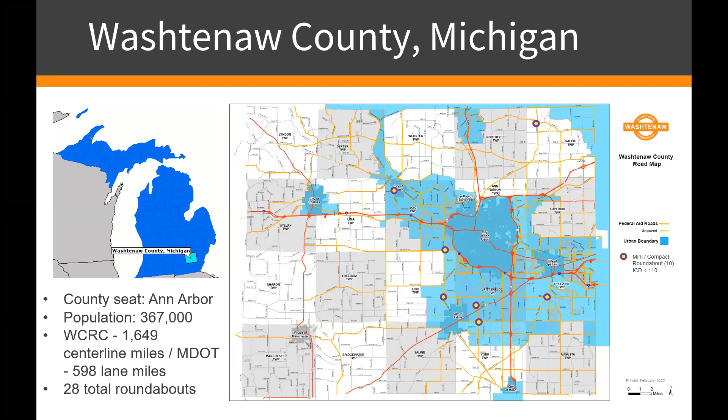We have 28 total roundabouts here in Washtenaw County, and of those, about 10 are what we'll call mini roundabouts or smaller roundabouts - that's the yellow bullseye with the purple around it. Full disclosure: when I say small roundabout and mini roundabout, I mean one and the same. Now, if you get into the breakdown with Federal Highway, it'll tell you 90 and less is a mini roundabout. Basically, most of my roundabouts here are between 90 and 110 - that's what I consider small or mini. So don't get hung up on the term, whether something at 110 should be called mini.

So moving on, why smaller roundabouts? From my perspective, it's because we can no longer afford the status quo. The last time the federal gas tax was increased was 1997, as part of the Taxpayer Relief Act. Ever since then, we've been collecting about 18.5 cents per gallon that goes to Washington D.C., then gets distributed unevenly - some states are donors, others aren't. On top of that, that revenue is not adjusted for inflation whatsoever. So we know the cost of living, labor, and materials has gone up substantially since 1997, to the point of a 60% increase per the Bureau of Labor Statistics.

So in a perfect world, if money were no object and we had unlimited resources, we could build a traditional size roundabout of say 130 or 140 ICD. ICD, for those new to roundabouts, is the inscribed circle diameter - basically think of it as the diameter of the roundabout itself. If you can build between 130 and 140, I'd say great. But the reality is we don't have those unlimited resources.

So instead of trying to do more with less, I like to say we do more with what we have available to us. I feel like we've really come a long way - Mark Lenters and I and a handful of others - in helping communities out and providing smaller roundabouts, and still achieving your goals. So how can we reduce costs but not their effectiveness? That's an important question to ask ourselves.

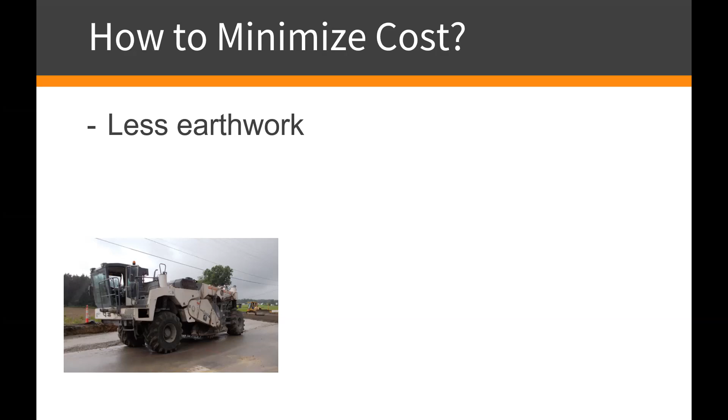It still drains, so I pulverize the existing asphalt that's there. Then within the roundabout itself, the inscribed circle, I'll widen and put stone in. Essentially what I'm doing is leaving everything there with the pulverizer. We'll shape it, move it around, get density, and then use it. So we're not double handling material, we're not trucking material. That saves us money.

Second, anytime you can reduce storm sewer, you're going to win. Most of my smaller roundabouts here have approaches of 300 foot, give or take, and as long as you're under that mark, you don't need storm sewer. Not always, I try to limit it though. What I do is curb and gutter with spillways draining into ditches. If I'm in a very urban environment with sidewalks and curb and gutter, that's not possible. But when you can, try to limit your storm sewer, because that's less material and less time to construct the roundabout.

And then finally, production paving is what really brings in the dollars for roundabout paving. Roundabouts are not production paving. By production, I mean you take the paver up to the flow boy, material mix goes into the hopper, and off you go. With the roundabout, you have a lot of stop and go.

Here you see a picture of a front end loader with the bucket transporting mix from the flow boy to the hopper of the paver, moving around the circle. But with that smaller footprint, if you can get that material built in a half day, that crew can then go to another site the second day, mobilize to another site where you're not being billed for the entire day's worth of work. So there's some dollar savings right there.

So from that perspective, those are the three main ways you can reduce your cost. I want to state this is very important too, because sometimes they'll get hung up on cost here. The dollar figures I'm going to quote you, although substantially cheaper than what I have been building in the past, one, it's gone up a little bit since these projects went in place, but two, every market is different.

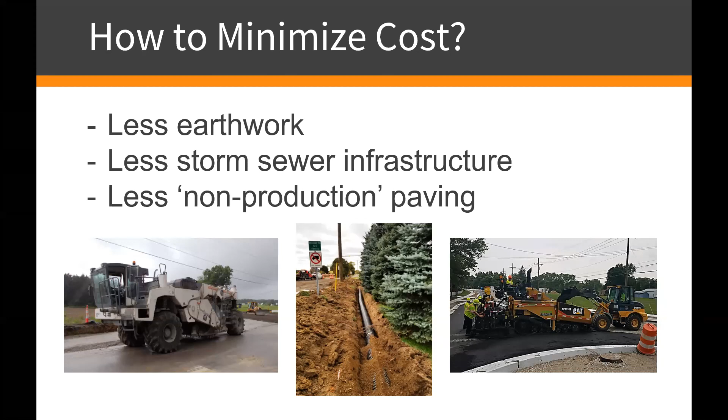So although you may not be able to get the figures that we can get here in Washtenaw County for whatever reason, when you compare it to your neighborhood and your market, you're still likely going to be winning when it comes to reducing your costs. So that's important for you guys to keep in mind as we go through the slides here.

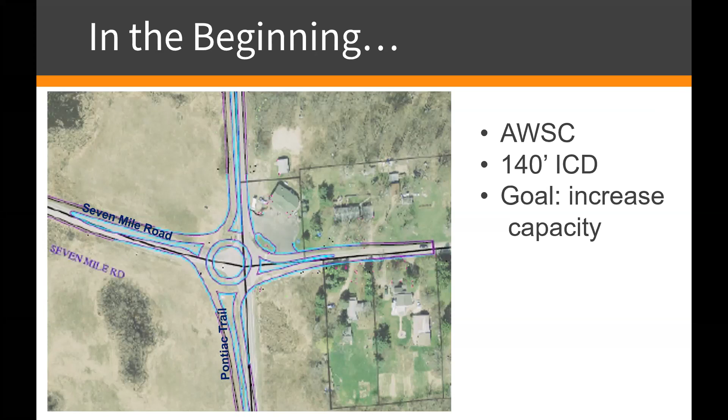So where it all began: Pontiac Trail and 7 Mile Road. In 2013, this is actually Mr. Lenters' design here. It's a four-way, all-way stop controlled intersection, and the goal was to increase capacity because at PM peak hours it backs up quite a bit on Pontiac Trail, which runs up and down, with 7 Mile left and right. With this 140-foot ICD, there was a general store, a party store for those of you familiar with the Midwest term, where you can get your liquor and other things. It would have been frankly a total take had we shifted the right of way onto their property. So we put the footprint onto the west side, both the northwest and southwest corners. Those were zoned for commercial use, but still in development concept only.

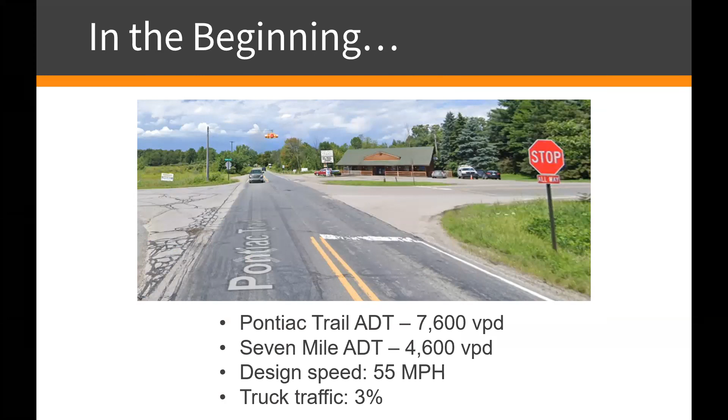So here's some background information. Pontiac Trail has average daily traffic of 7,600 vehicles per day, 7 Mile Road 4,600. Design speeds of approaching vehicles are 55 miles an hour with 3% truck traffic. Where things came apart from a fiscal standpoint was the amount of right-of-way that was needed.

As I told you, we shifted the footprint of that roundabout over to the west so we didn't have to have a total take on that party store on the northeast corner. Well, lo and behold, we ended up needing 0.55 acres, just over a half acre. We were of the opinion that it wasn't going to cost that much, frankly. We were guessing in the neighborhood of, say, $50,000, give or take.

Well, we ended up going through the formal process of an appraisal, and to our surprise, it came over $100,000. I think it was close to 120. The property owner who owned both corners there was seeking $300,000 plus, and we're just in no position to be able to come close to a number.

So ultimately what we had to end up doing was canceling the project, return the federal aid, which in this case was CMAQ dollars, and it sat until last summer, where we actually built a mini roundabout of an ICD of 90 foot and needed substantially less right of way.

But this was kind of a disappointment, not kind of, it was a disappointment. It was a setback because, you know, it was a need. It was our number 1 rated intersection when it came to capacity needs to do something. So, yeah, it stung. It stung that we weren't able to make this project go ahead and start.

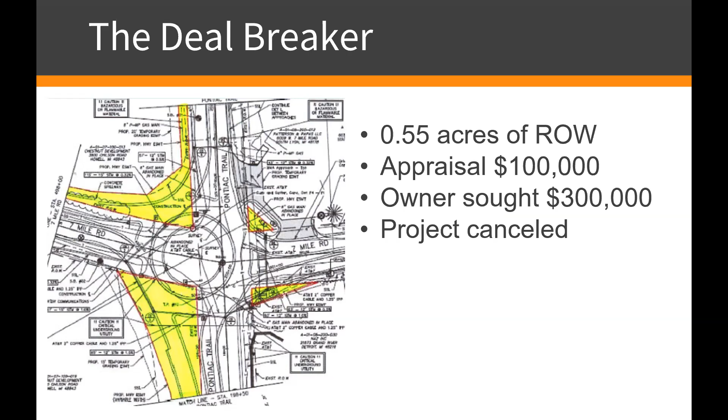So that led us to our first roundabout project at Textile, Hitchingham, and Stony Creek Road, which occurred in 2015. More or less 6 months later, we had an informal meeting internally, and the people within the organization came to me, knowing that I was going to lead the charge of the design, and said, Mark, what do you think?

Should we put a roundabout or a traffic signal there? And the first thing that came back to mind was how we got stung at Pontiac Trail and 7 Mile Road. And I was like, well, maybe we should consider the concept of a mini roundabout. And everyone at the table kind of looked at me like, what are you talking about, Mark? Like I had a third eye on my forehead.

Well, Wei Zhang is a mini roundabout expert. He is a representative for the Federal Highway Administration out of Virginia. Perhaps some of you know him. I met Wei and saw a presentation of his at one of the roundabout conferences that stuck in my head, and I asked myself, would this be a good candidate to put mini roundabouts in at these two locations?

And Mark Lenters would be the first one to tell you when I floated this idea to him, he's like, I don't know, man. But we both agreed, let's go talk to Wei. My bosses agreed, let's talk to Federal Highway, see what they have to say.

So here's the layout of that intersection. Textile Road runs from side to side. Stony Creek Road is on an angle. Hitchingham Road runs up and down. So the only two intersections we were looking at was on the Textile Road corridor.

They were both all-way stop control intersections. And the problem was that it took 20 minutes at 8 o'clock to get through these two intersections combined because of the four-way traffic.

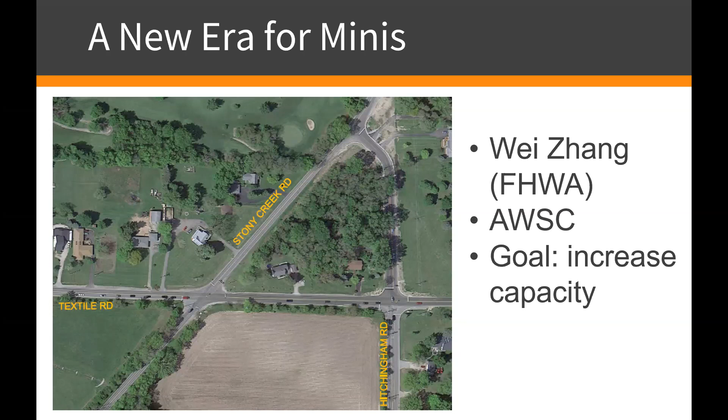So with them being all-way stop control intersections, the goal was to increase capacity. And ultimately, when I approached Wei and talked to him about this conundrum and idea, he agreed to look at our data and see if it would be a good candidate. He was looking for people to have projects and do some before and after analysis.

So some background traffic here. Approach speeds 45, 55 miles an hour coming in. You have the ADTs of 66, 68, and 42. So relatively well balanced and 4% trucks.

And lo and behold, Wei Zhang, after looking at his software, said, yes, this is going to work, and it's going to work really well. It's going to be a little bit on the upper end as far as what it can handle capacity-wise, but it can work. And if and when it gets to the point of oversaturation at the PM peak hours, then you could put another roundabout at Stony Creek and Hitchingham to use as a bypass.

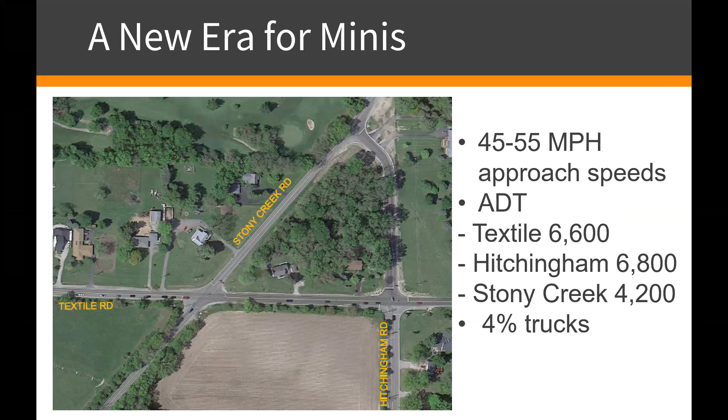This is the footprint that we ultimately went with. The ICDs were 90 foot. And then the total cost for both roundabouts were $800,000, so that was $400,000 per roundabout in 2015 dollars. So again, don't get hung up on that number. Maybe you can or cannot get that close in your community in the southeast part of the country.

You have a better chance than you will in New England states. But my point is that every market is unique.

One of the trade-offs I want to warn you about is these roundabouts do break under traffic. By breaking, what I mean is you'll get a level of service F. And it doesn't really matter what your ADT is from my perspective.

It's all about your peak hour factors, because that's how you rate a roundabout, as far as can it handle the peak hour 10 or 20 years out, with reasonable growth factors in that time. And if you start getting into 1,500, 1,600 vehicles in the peak hour from all approaches, chances are for a 90-foot roundabout, you're going to start stressing it.

It'll work like it does in this case, but you're not going to have a lot of room left for capacity should things expand and grow in the area. So maybe you want to increase the diameter, say to 100 or 110 feet, which is still cost savings compared to a traditional 130.

But the point is that you have to be very mindful of what your traffic volumes will be going into these intersections 10, 20 years out, so that you're not criticized, say 5 years down the road, when you're experiencing a level of service D, E, or F because you didn't account for the right amount of traffic during its design life.

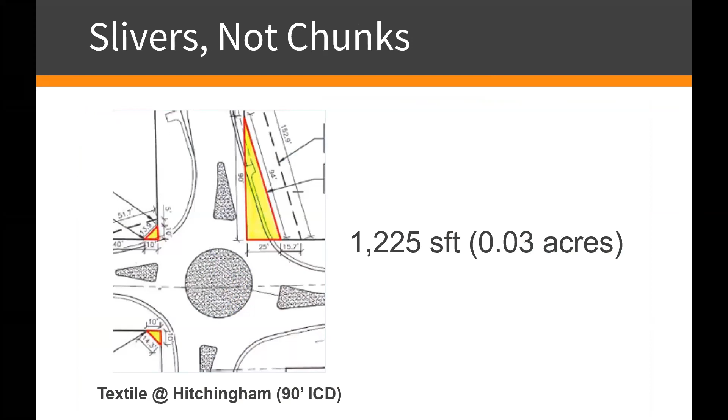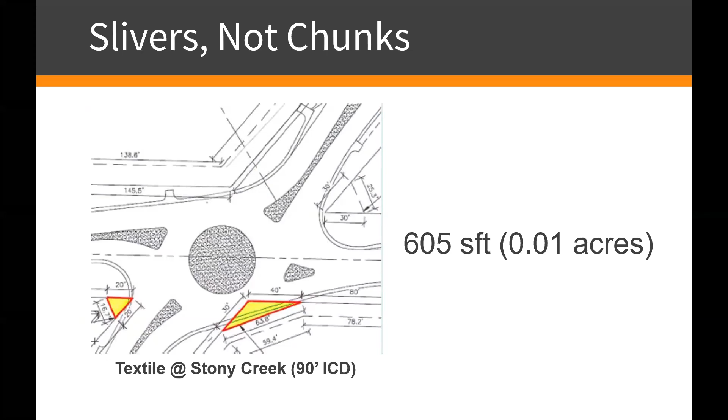So let's talk about the right of way. I was talking about the Pontiac Trail and 7 Mile intersection, how we needed 0.55 acres. In this case, with the 90-foot ICD diameter roundabout for the Textile and Hitchingham intersection, we only needed 0.03 acres. And then for the one at the angle on Stony Creek and Textile, just 0.01 acres. So a total of 0.04 acres for 2 intersections.

For a grand total land cost of $3,575 in 2014. That's huge, because that's a 92% reduction in area compared to a traditional size roundabout.

Now, keep in mind that every zoning is different as far as the land goes, but it's really all relative, because if it's zoned commercial or zoned farming, it's still going to cost you less. It's just going to cost you substantially less if it happens to be something that's not agricultural in use, especially if it's zoned industrial or commercial.

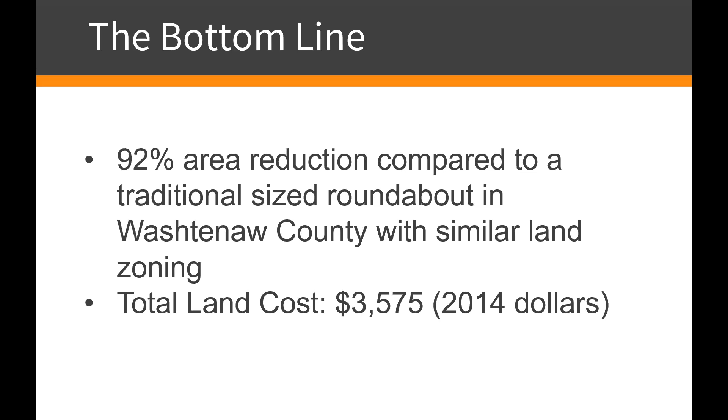So the mini roundabouts will give you a big win when it comes to less need to purchase right of way, and also reduced impact on the property owners that are right next to the project occurring.

So let's talk about the center island itself. What makes a mini roundabout different from a regular roundabout? Frankly, not much, other than the fact that because it's smaller, the circulating roadway is smaller in nature.

The larger trucks or farm equipment, we're talking about combines, if they happen to run with their heads on there - in Michigan, they don't, they typically tow those behind on a pickup truck - but they off track onto the center island.

Now, this is not Textile Road, this is a different roundabout I call Moon and Bemis. But you'll see there that all the off tracking in every which direction makes it a great example of how, when trucks are turning left, that's what it's there for.

So you don't want to put something in your mini roundabout in the center island because it's there for off tracking to turn left, and in some cases right, if you've got a pretty skewed angle. So you'll need to put some type of apron in.

We raise ours 3 to 4 inches in height, and we do that because it still allows the trucks to be able to off track and make their left turning maneuver, but it also discourages the sedans from driving up and over them.

Our first runs at Textile and Stony Creek and Hitchingham were flat. And I'd say about 15% of the traffic in off-peak hours just disregarded it and did a direct left across it. Not a big deal, but it was concerning to some residents in the area when they witnessed it.

So we ended up just raising the island a little bit, giving just enough of a deterrent where people in sedans didn't want to drive over it. It forced them to drive around it, but at the same time it was more than adequate for trucks to be able to turn left over.

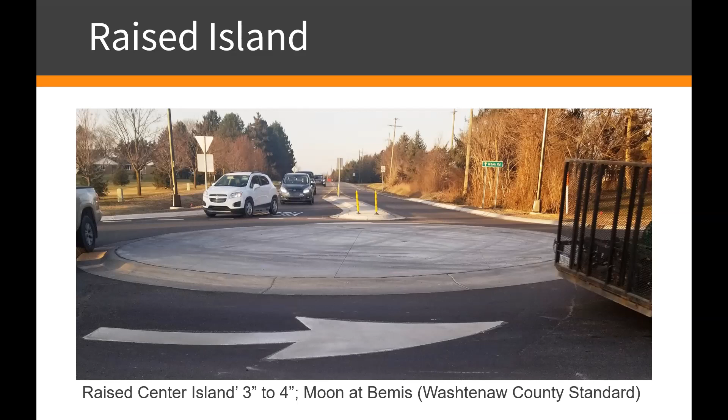All right, I'm going to take a quick drink here as we segue into the Baker Road roundabouts.

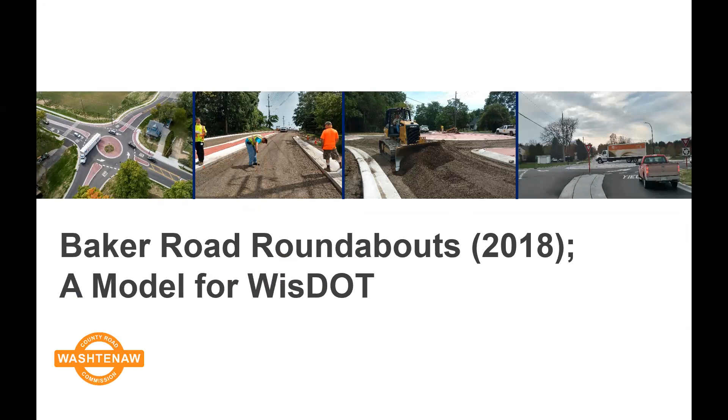So Baker Road is an example of a larger size roundabout that you can utilize where you have more commercial trucking. The more trucking you have, chances are you're going to want something a little bit bigger. So a little bit of background here: this was done in the city of Dexter. There is a school complex, Dexter Community Schools. This road, Baker Road, connects to Interstate 94, 2 miles to the south. Then Dan Hoey Road is an industrial road, an all-season road that connects to an industrial park, as well as Baker Road being an all-season roadway too.

So we have a lot of WB67s commuting back and forth from Interstate 94 to make deliveries to the industrial park 5 days a week. So we had to have two intersections that made sense to accommodate this truck traffic.

The city of Dexter, we had Shield Road. When I say we, Washtenaw County Road Commission had jurisdiction of Shield Road. Parents of new drivers at Dexter High School at 2:30 were concerned about their children pulling out of a two-way stop controlled intersection for the apartment complex on Shield, turning left on Baker to go into town, with traffic coming in at 55 miles an hour, sometimes higher. They felt a project needed to happen to slow down those speeds.

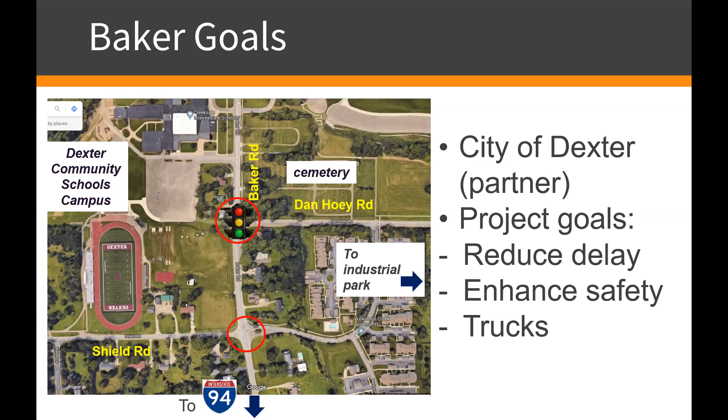The City of Dexter heard about this and said, hey, let's work together in tandem and do something similar, so it just made sense. The City of Dexter owns the Baker and Dan Hoey roundabout. So together we combined to put a roundabout project together. Ben Wilkinson out of Madison primarily did this under Mark Lenters' leadership.

Where you see the footprint here, it's oriented a little bit differently, with Shield Road to the left and Dan Hoey Road to the right. Both of these have an ICD of 100 foot, but the one at Dan Hoey Road is skewed 105 to 95 in the shape of an ellipse. The reason is that there was a cemetery there with Civil War veterans buried right in the corner, and we had no desire to transport them someplace else. So we got creative with where we could build, so we didn't have to exhume the bodies. That's how we came up with the oval shape, and it worked out fairly well.

Ultimately, we ended up having a third partner come along, Dexter Community Schools. That was a key intersection before the project happened. They wanted to have another point of ingress/egress for traffic for football games. So basically we worked with them and they became a third funding partner to make that into a four-way legged roundabout.

The total project cost in 2018 dollars—this is a completely urban environment, so with street lighting, sidewalk, curb and gutter, storm sewer, 2 roundabouts—came to $1.3 million for an ICD of 100 foot. So again, pretty substantial savings when you think about it, because for many communities, a traditional roundabout costs $1 to $1.5 million just for one roundabout.

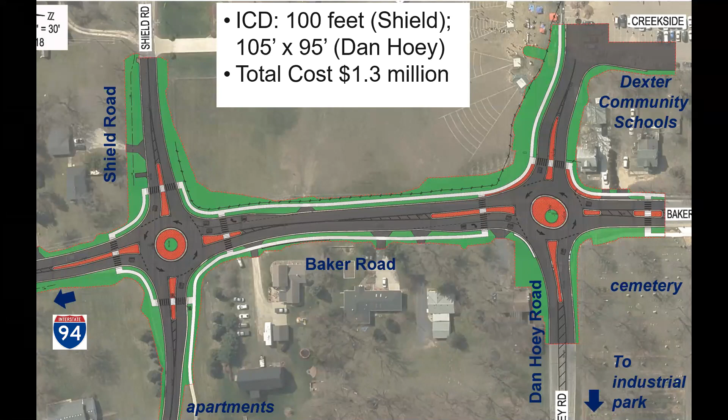And it worked out really well. So here's some ADT: Baker Road, 14,000 vehicles per day; Shield Road, 3,200; Dan Hoey Road, 5,800; and you can see the speeds coming in. Now the truck traffic sounds low at 3%, but keep in mind that when you have 14,000 vehicles per day on Baker Road, that's why that number looks so low.

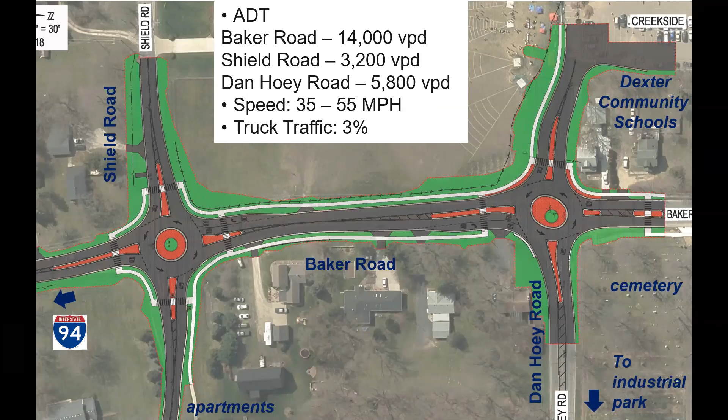Here's the footprint of the final project via a drone. You can see a WB that looks to me like it'd be a WB-62 turning left from Baker Road onto Dan Hoey Road there.

And that's what that apron's there for. It works very well. Now this one happened to be big enough where the city of Dexter was able to put some landscaping there in that little dot, just to give it a little bit of spice, since it's an entry point coming into town. That works out well. But the other roundabouts, when you have a 90-foot ICD, you're not going to have enough real estate to put something like that into your center island design.

So here is an example of trucks going from Baker Road to Dan Hoey Road, both inbound and outbound. You see there's a dedicated right turn lane there because the volumes warranted it.

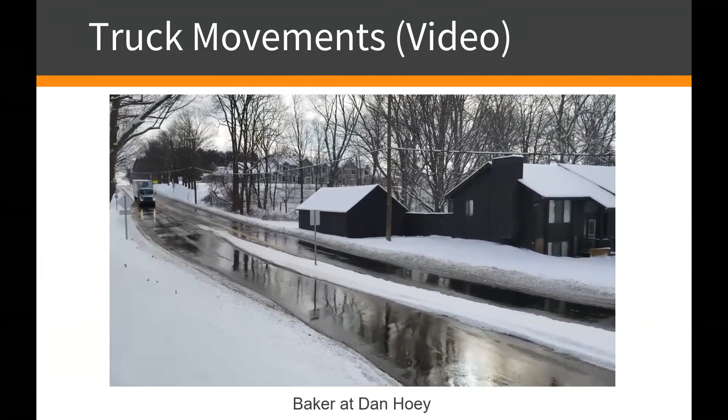So I'm standing on the cemetery corner there, elevated up in the air. Very important load there, Miller Lite. He waves to me, I wave back to him.

Now you're going to notice here that the truck's going to off-track onto the center island. That's okay, that's what it's there for, that's what it's designed for. And it goes up, a little bit of a shift, slow speed, and off it goes to Interstate 94 to wherever its next destination is. So mission accomplished, big success in the community.

This, by the way, has pedestrian crosswalks for Friday night lights. We don't have time to show you, but it works out very well to accommodate pedestrian use, from small tykes with grandma and grandpa to unsupervised teenagers going to the football game.

So let's conclude here and talk about drilling for data and what I've learned. So improved operations at Moon and Bemis: for an all-way stop controlled intersection, I gave you some background on this in a longer presentation, but this had an ICD of 82, and the total cost of this one to a contractor was $300,000. That was an all-way stop controlled intersection and it had a level of service of F beforehand.

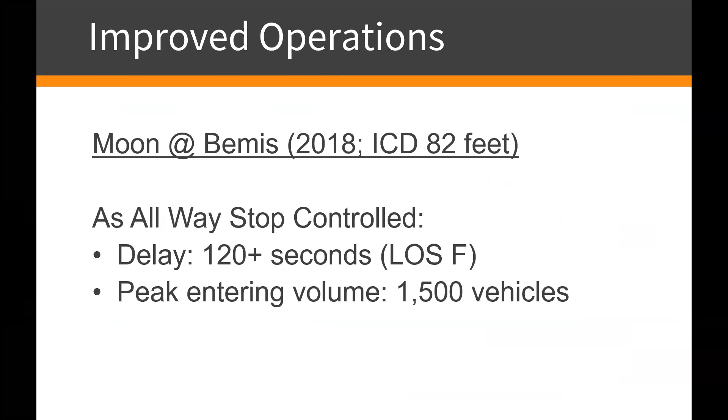Once we had peak entering traffic volumes of 1,500 at the peak hour, and once we built that, our operations increased substantially for $300,000 to a level of service of B in the AM, at 13 seconds overall, and then a PM peak of A at 8 seconds. So when you think about that, that is a lot of bang for your buck when it comes to having to do more with what you have available to you.

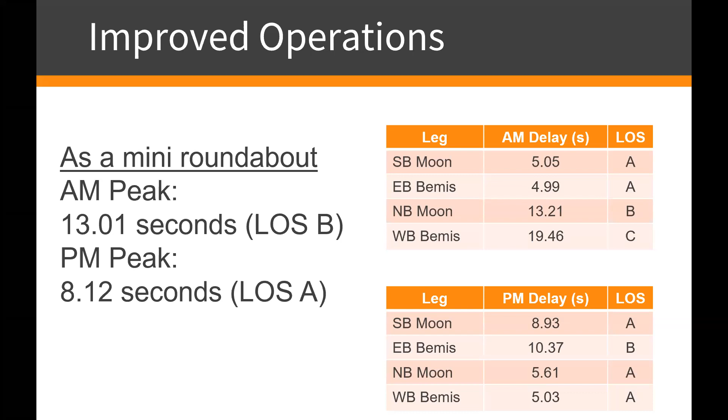But let's talk about that one trade-off, the most important trade-off that comes with this. I promise you that under most circumstances, you will have an increase in what we'll call PDO crashes. In Michigan, we call it property damage only. Many states call them the same thing, but perhaps your state's a little different. I like to call them fender bender crashes, or deductible crashes, where everyone walks away, no one's hurt, you pull the car off to the side of the road, and you end up having to take your car to a body shop.

With many of our all-way stop controlled intersections, we were having about 5 crashes per year. And in many of those crashes, people were getting hurt. In some cases, they were getting killed because they're getting T-boned at 55 miles per hour or higher. It happened in more than one intersection, okay?

But when you put in a smaller roundabout, a mini roundabout, anywhere from the size of 90 to 100, 110 of an ICD, you're going to have in total somewhere between 8 and 15 PDO crashes per year. And if you get hung up on the number jumping from 5 to 8 or 15, people are going to say, oh my gosh, you made this intersection worse. How could you be so ignorant, how could you be so careless in what you're doing?

My perspective is completely different. No, we made it safer. Not every crash is the same. Every crash is unique in its own respect, just like every roundabout is unique.

And when you look at all the factors when it comes to reduced costs, reduced impacts to property owners, reduced right-of-way costs, reduced time to construct it, shorter detour routes in duration and time—because time is money to people—fewer emissions into the environment, increased capacity, and people are not getting hurt. Although there's a spike in the PDO crashes, when you factor everything else in, we here in Washtenaw County are of the opinion we're doing the right thing, and we're being fiscally responsible for what we have available to us to deliver in both capacity and safety.

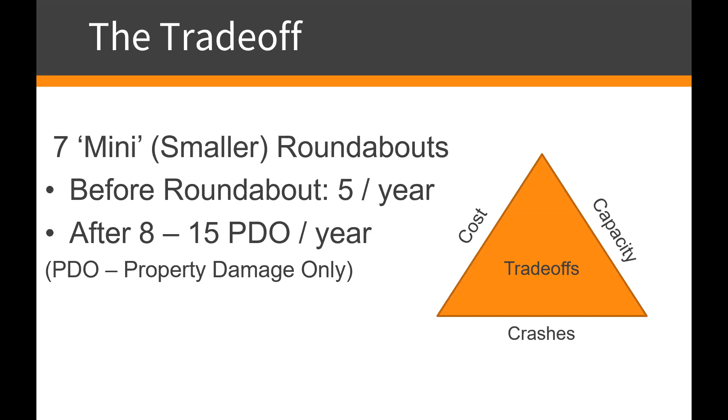So I just want you to be aware of these figures as you go into it, because I don't want you to get caught off guard. Maybe your mayor, your city council, or your county council will say that's not something politically we're willing to do. So be it. Here in Washtenaw County, it is acceptable for the most part, and we've been given the green light and asked again and again to build a mini roundabout here, there, and other places where it makes sense. That's the biggest trade-off I wanted to bring to your attention.

So let's finish up with recipes for success in the world of Mark McCulloch. I would start with the minimum ICD of 90 feet. I've gone less, and it gets trickier, with PDO crashes tending to go above 15 if you do that. So from my perspective, the base is 90, work up from there. You're not going to get a substantial cost difference by going below 90 feet.

I learned that the sweet spot is 100 to 110. That's when people come to us and say, hey man, I really like that roundabout, can you do something like that again?

From my perspective, all-way stop control intersections work better for mini roundabouts than two-way stop control intersections, because people are already conditioned to stop. That's important, because with a two-way stop controlled intersection on 2 of the legs, they're not conditioned to stop. That's not to say you can't do it, but it's very critical that you have excellent entry angle deflection coming into the roundabout so that drivers are ready to slow their cars down to about 25 miles an hour through the roundabout.

Use realistic growth factors, because if you don't, your numbers are going to be flawed. It's going to tell you that you're going to be way above 1,600 vehicles per hour, and it's going to tell you that you need something bigger when in fact you probably don't.

Buy-in is critical. Make sure you talk to your fire chief, your police chief, and any other stakeholder. In Michigan, we have townships, and those are our stakeholders too, so we talk to our township boards to make sure they understand why we're doing a project like this. For the most part, they've seen enough of them to know we're on the right track.

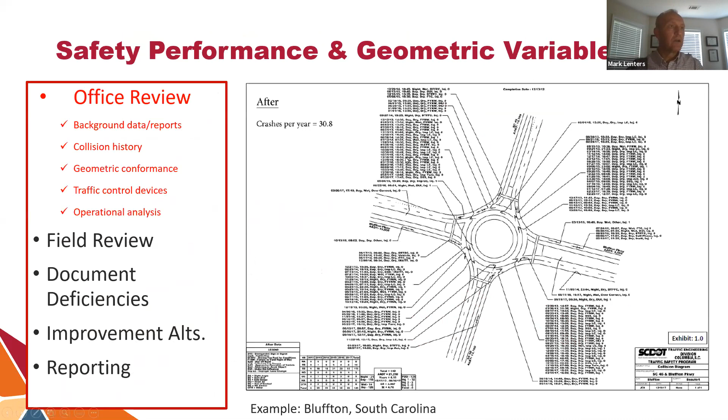In the example that I showed you, you could see that we have a problem with exit circulating—a serious problem with high incidence of exit circulating crashes. So all we can get right now with these models is the percent crashes in terms of the percent of the whole for that site. But we don't have a safety prediction model. So that's still something we need.

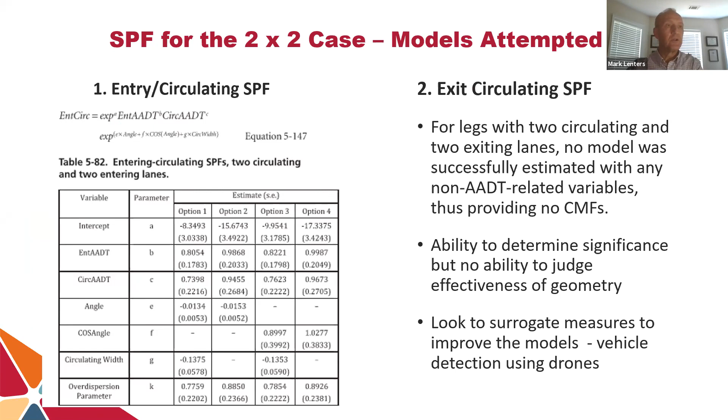Nevertheless, we moved on with the project, and without fully developed models and weak crash prediction at the geometry level, we turned to engineering judgment for some of the support. I'll show you some technology towards the end of the slide set that's going to improve our ability to do crash prediction at the geometry level.

So in the field review, this roundabout was built about 7 or 8 years ago. Annual frequency of crashes actually did reduce in the conversion from signal or stop control to roundabout, and so did the crash severities, but not sufficiently to be deemed a success. I'm going to give you a quick overview of the study and the solutions, and show the point where we departed from the ability to be data-driven and went more in the direction of engineering judgment.

With the current NCHRP 888, we might have had a better chance to at least identify the percentage split with confidence and say we do have an overrepresented condition of exit crashes, and that will help drive the justification of the improvement—that confidence in the data, that confidence in the analysis of that crash information. So ultimately, engineering judgment played a bigger role in the development of the results, using a more rational method and not so much data-driven. I was asked to review the conditions in service and suggest some possible countermeasures.

The office review, essentially the crash diagram and geometric conformance, identified the possible target crash pattern of entry circulating, exit circulating, but not with absolute confidence. So we turned to the field review and sought to identify causal factors with a focus on entry circulating, exiting crash patterns. What the observation showed us was that drivers were not having sufficient time to cross the gap, essentially the gap being the sketched green area.

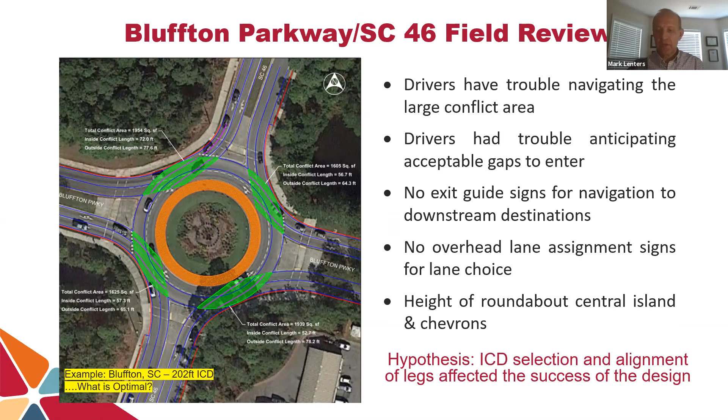This is something we've seen in many states, the idea of overhead lane designation. At least we sort out the lane choice problem so people aren't making lefts from the right lane, and that will help the situation. There were a number of sideswipe crashes circulating, certainly not an overrepresented pattern, but at least wayfinding would be minimized.

And then to turn to education as another remedy, helping people understand what lane to pick for what movements. These are education pieces that we've had in circulation with many agencies.

Another option for a medium term countermeasure was to look at a hybrid roundabout, essentially in brute force way, reducing the number of conflict points in half, just essentially 2 by 1 with the right turn, still having a conflict point, but only with the right turn exiting traffic.

But this, in a sense, is going to cut capacity down too. Here someone's constructed a 2-lane roundabout, and we're going to lose one through lane and left, and the availability of all that extra throughput capacity, because we're cutting out one through lane and making it a right turn only. So while this can be done and it would improve safety, it's more costly and it would degrade capacity.

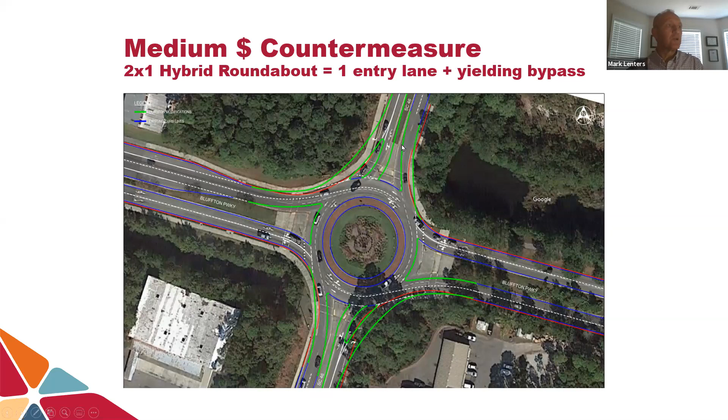Now that's not a model, that's somewhat engineering judgment. And so it would have been nice to have the NCHRP data to support us and dig a little deeper into that data set to see if we could pull out some of the geometric parameters that might justify something a little less costly than this.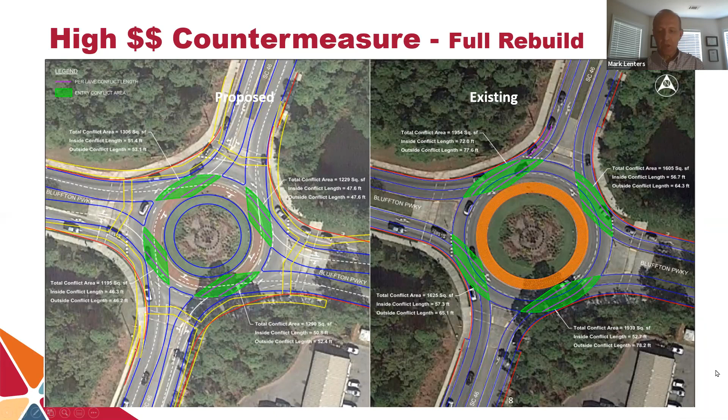So information that wasn't previously available for safety reviews includes things like speeds, conflicts, as I've been looking at with the patterns observed in the field. Truck tracking is another big one. We can't generate precise measurements of those things, particularly speeds.

And significance testing of crash patterns. We haven't been able to get good confidence in that at the intersection, below the intersection level, at the geometry level. So capturing statistics on in-service conditions and reference statistics for significance testing has been difficult.

Turning to drone video analysis with emerging collision prediction models is going to afford a more comprehensive understanding of roundabout functionality, and there are many things it could contribute to in the future. This gives us recommendations for in-service reviews to update geometry, markings, lane width, signage, and so on with greater confidence.

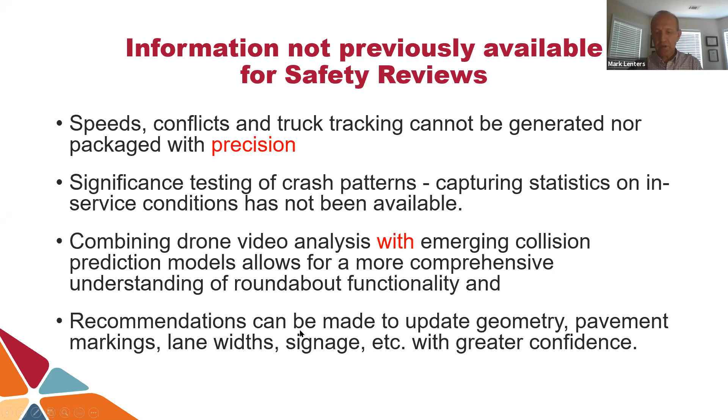Looking at traditional crash diagrams, like this study from a site in Ohio, we've always been able to identify crash clusters, but how do we attach significance to the documented pattern? When is the pattern significant, not only for the site but compared to other roundabouts? Without good significance testing, we risk identifying false positives, thinking it's a problem when it isn't, and then spending money unnecessarily. It'd be like going to the doctor and having a gallbladder operation when it's actually your appendix that should come out. Historically, as a practice community, we've sometimes gone ahead with costly countermeasures without the highest degree of confidence.

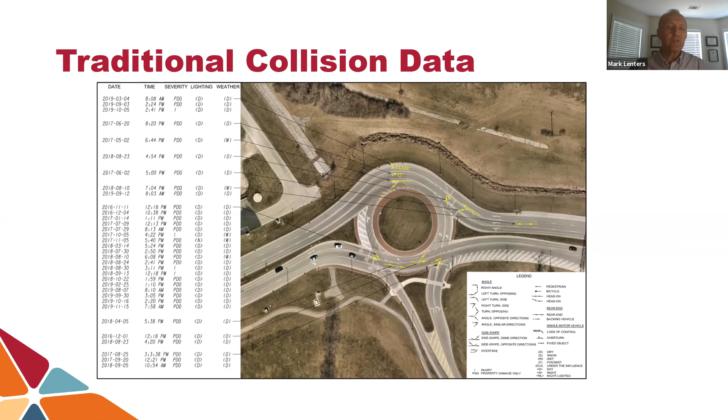So here's a new technology solution, something we've worked on with Murray Allen, shout out to Murray. Let's see if I can get this video going. There we go. So vehicle detection and vehicle tracking - a pixel crosses a video image and can be tracked using an algorithm. MAR recently partnered with Kimley-Horn on roundabout data analysis projects in California, Ohio, and Georgia, with a particular focus on safety and operational challenges.

Some of the things we can produce include counts, but also vehicle tracking patterns, which include speeds, lane discipline, lane changes, fast path, driver interaction, and conflicts in particular. It gives us the ability to get heat maps for showing high volume areas, high conflict areas, and lane change areas. This is really the future of in-service reviews, to do what we couldn't do standing on the ground and just observing traffic somewhat casually at times.

Truck tracking is another one, and lane changes - you can see some of the blue lines crossing lanes. We're concerned about that sort of thing, whether it's because of a fast path, and we can identify what peak period that's happening in, whether it's off-peak, just to determine whether we've got problems with lane changes and sideswipe issues developing from that.

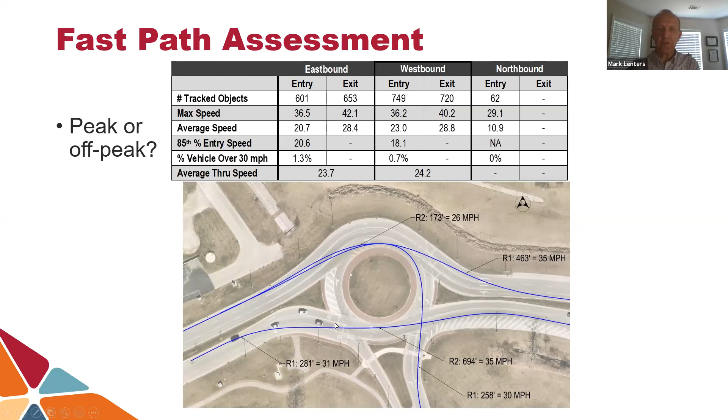The ability to analyze lane changes and swept paths in this diagram area shows some of the conflict patterns for entry-circulating conflicts. We can see some of the rear end conflict patterns, and these can be derived statistically for however many times you sample - it doesn't have to be consecutive sampling. You can take 20 minutes of drone footage, come back and take 20 more minutes during the rest of the peak hour. Then it's the sheer number of conflicts that you can correlate with observations of crashes, and vehicle conflicts can eventually help us improve our collision prediction.

Another thing they're very good at is tracking trucks, and we can look at truck swept paths as well.

The geometric outline of the truck's body can be tracked and taken through the roundabout, and we can see whether there's lane discipline for truck drivers. We have design cases 1, 2, and 3 that truck drivers sometimes don't exercise. This is a very large roundabout with 3-lane entries, and lane discipline is certainly achievable because the entry and circulating lanes are very wide, yet truck drivers will sometimes still cross lanes, depending on whether it's peak or off peak.

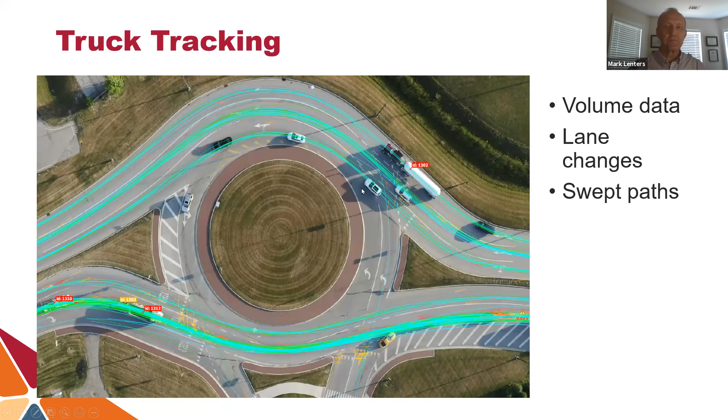Vehicle tracking and vehicle detection holds great promise for collision prediction. In the signals world, they've been doing it with real-time cameras 24/7, taking safety performance functions and improving the quality and confidence in those SPFs by continually sampling conflict patterns and correlating them with collision history at those intersection locations.

The key variable is time to collision, and that's the area we're struggling with, where we need help from research. Is it 0.03 seconds? If you run this algorithm with varying time to collision values, you'll get more or less conflicts. What is the right number? We're going to need help from research, from a university or FHWA and a university, to sort these things out. This isn't something the average roundabout designer can fathom.

So we see great promise in these tools. Algorithms are needed to improve current SPFs, particularly the NCHRP 888 algorithms. Crash prediction models could be improved through vehicle detection as a surrogate for crashes, detecting conflicts and correlating that with crashes to improve those models.

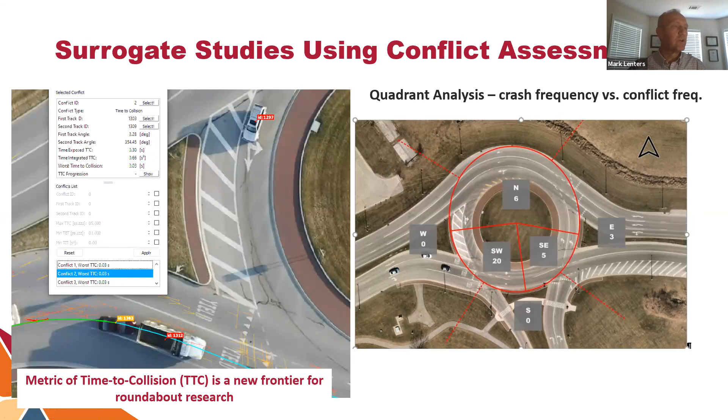Coming up to the finish here, it's really about getting more confident conclusions using a data-driven approach. Drone video detection and artificial intelligence can be used in follow-up studies as well, monitoring sites and improving the effectiveness of an implementation. Our current methods haven't been sufficiently data-driven to develop high confidence in countermeasure recommendations. New models are helping confirm whether an intersection has a significant problem at the leg-specific level.

Since SPFs are not quite there yet, we can turn to drone data collection and video detection to help improve the quality of those models for crash prediction, as an aid for future SPF development. With all the different opportunities with trucks and speeds, we're getting much more precise data collection using drones than any of our on-the-ground observations could afford.

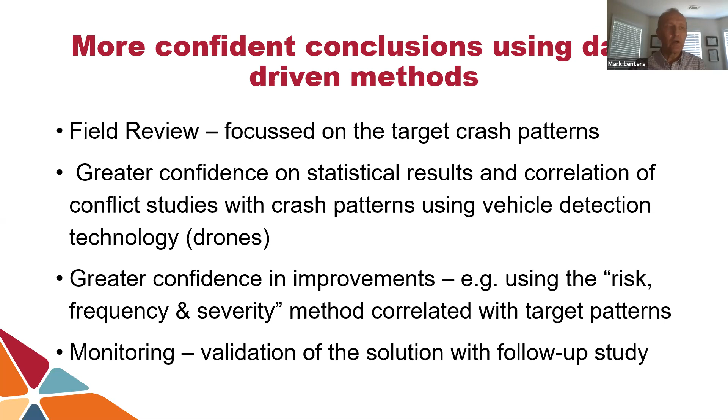So I think that's it for my time. Thanks everybody for listening, and I'll turn the screen back over to Josh.

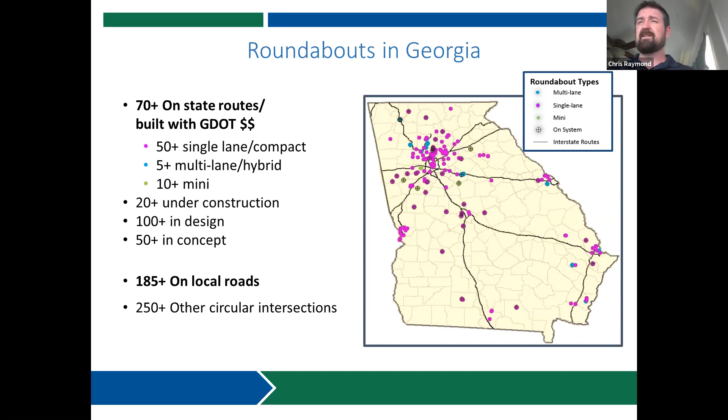So things we're looking at introducing in the guide: this is a supplement to our design policy manual. It has a very brief summary on the things we're looking for in roundabout design. Obviously, this is very expansive, going into how-tos and a lot of nitty-gritty details on what we think is the best way to approach a successful roundabout design, underpinned by national research and documentation, with that whole focus on practical design, very important. Currently we've got a version out now, but we've got a final draft of a very heavily revised version, and that's what we're going to go through in this presentation.

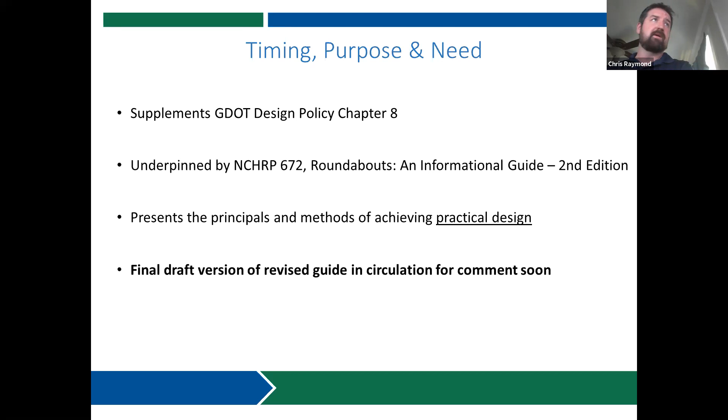To start off with, we've got the roundabout types: single, which in Georgia consists of conventional, there's 130 to 160 size single lanes, then compact, which was kind of riding that line in between conventional and mini, and we're trying to get some of that central island landscaping in there, because we see a good benefit to that as far as both aesthetics and safety, giving the driver something to see as they're approaching the intersection, more so than just a flat concrete slab.

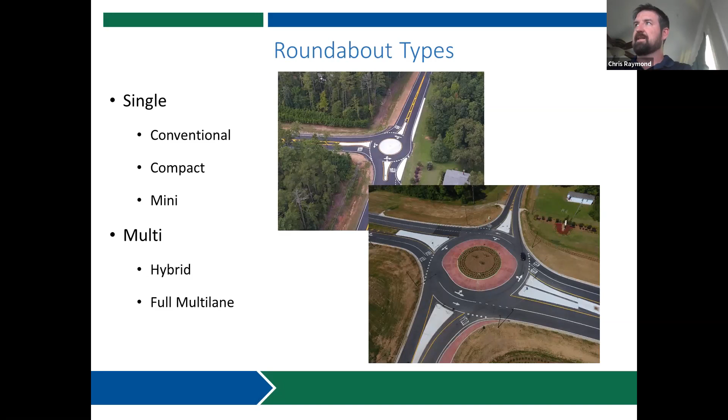And then multi-lane, we're starting to get into a good bit more in Georgia. We've got a few hybrids on the ground, a lot of full multi-lanes, full 2x2s that are in design right now. One of the big things we're bringing to this section, and luckily we're able to get this all in before we get too many of these on the ground, is trying to integrate some elements of turbo roundabout design, which has been kind of a hot word as of late. But we're not abandoning the principles of American roundabout design. We're just cherry picking the concepts that we think would be beneficial to enhancing multi-lane roundabout design.

So now getting into those geometric design elements, the first thing we want to give the designer is make sure they know there's an iterative process to roundabout design. It doesn't mean you just directly go from a single lane roundabout to a full multi-lane. You've got to look at your layout and start from the simplest configuration and build out based on capacity needs, so you're not over-designing the roundabouts and creating more conflict zones than necessary.

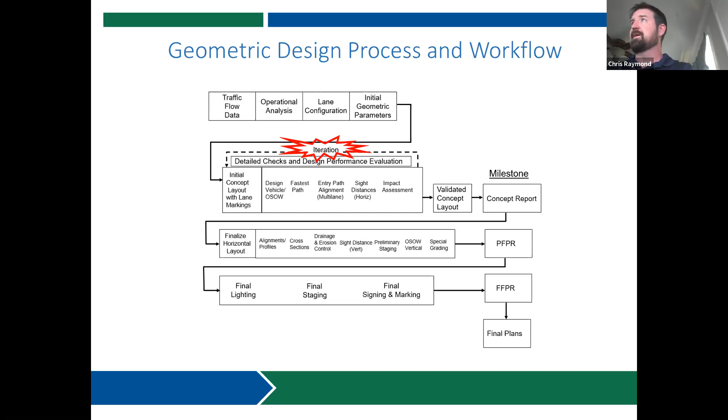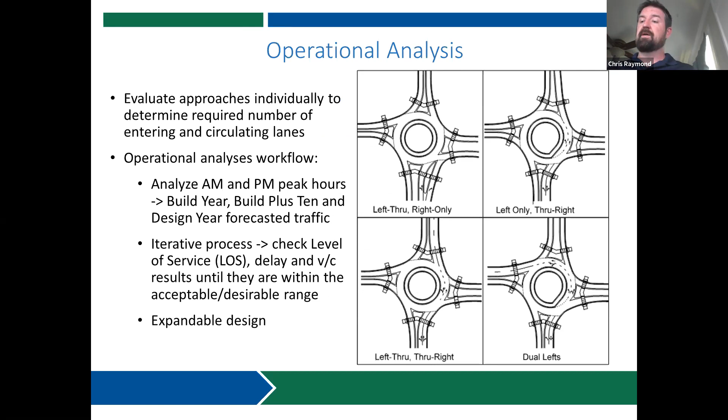Getting into the operational analysis, adding right turn bypasses where needed, or a second through lane and second exit lane, or dual lefts, or however best handles operational needs, without going above and beyond and putting more asphalt on the ground that costs more money and can cause or reduce the safety aspects of roundabouts.

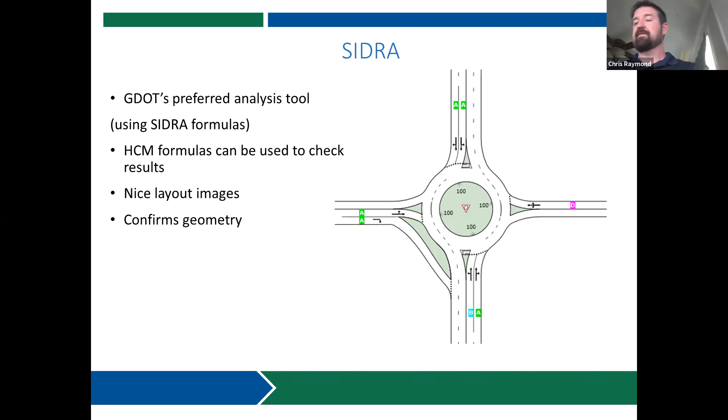Our preferred analysis tool is currently SIDRA. We like it. We think it's useful for younger engineers or less experienced engineers because it gives them a good picture of what configuration they're looking at when they're running their analysis, and also the benefit of having a couple different formulas to work from to check your performance from a few different views. We also have a tool, our Georgia Roundabout Design Analysis tool, that's free to use, but again we prefer, especially for younger designers, that more interactive, graphic-intensive program, Sidra.

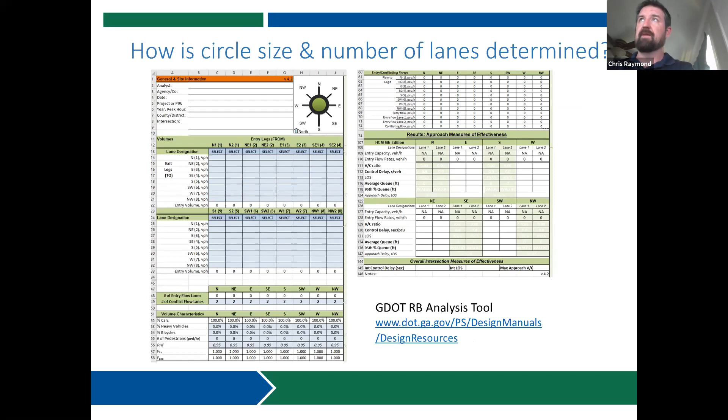And again, we're focusing on the core elements of roundabout design, the data, as Mark Lenters had mentioned, the data that's solid, that we know, backed up by years of research, that this is the kind of stuff that works: providing space for trucks, focusing on refuge islands for pedestrians, channelization, and proper signing and marking to ensure people are getting in their correct lanes prior to getting to the roundabout.

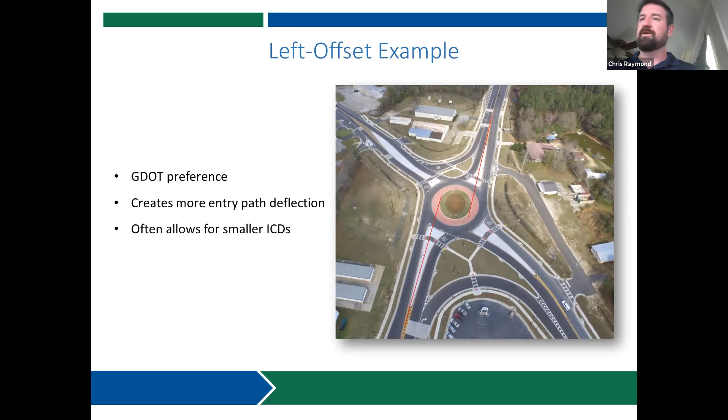One of the biggest core elements is that left offset, which isn't a typical design element of Dutch turbo roundabouts, but something that we're holding on to even while we're introducing turbo elements to our designs.

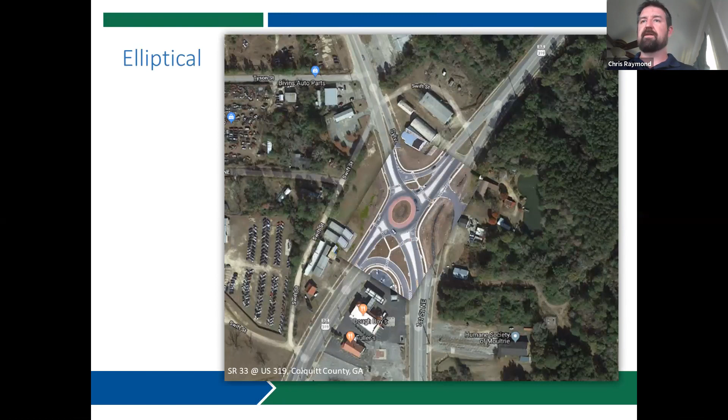Some other things we're showing designers they can look at to optimize the design for both practicality and safety: look at your intersection and don't necessarily assume it has to be a circle that goes in. Look at elliptical designs, things of that nature, to best fit the intersection for its needs.

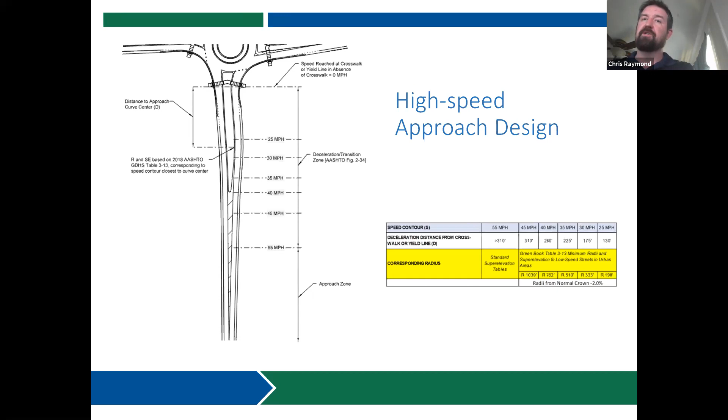We've had a lot of confusion from younger designers, and honestly more experienced designers, on how to handle high-speed approaches, especially as you're approaching in a super elevated curve—how to transition those down without having the driver carry too much speed into the approach. So we're going heavily into how to handle that whole process, looking at entry curves.

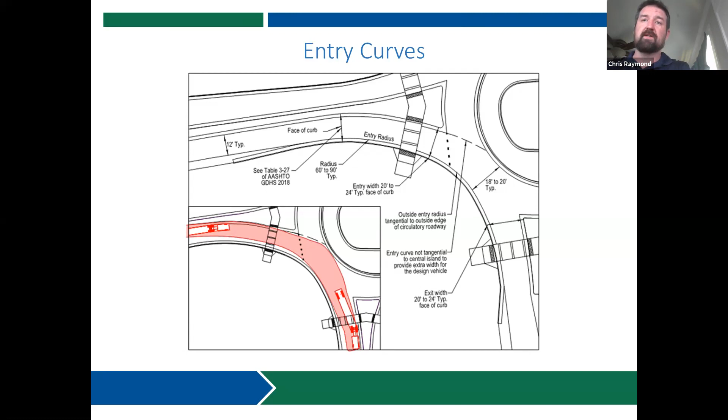Some best practices that at first wouldn't seem as obvious, but have been shown to be effective in optimizing design—specifically in this case for trucks—to keep circle size down.

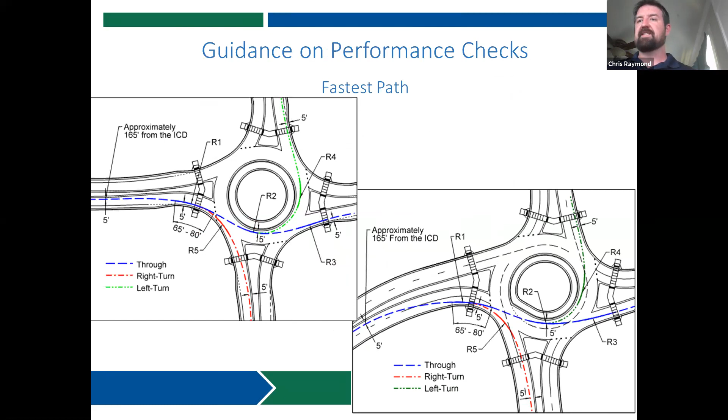We're showing a step-by-step process walking them through performance checks such as fastest paths, giving them all the tools and tips they need to do that successfully on the first go, and giving them more tools to work with to fit the constraints of their design.

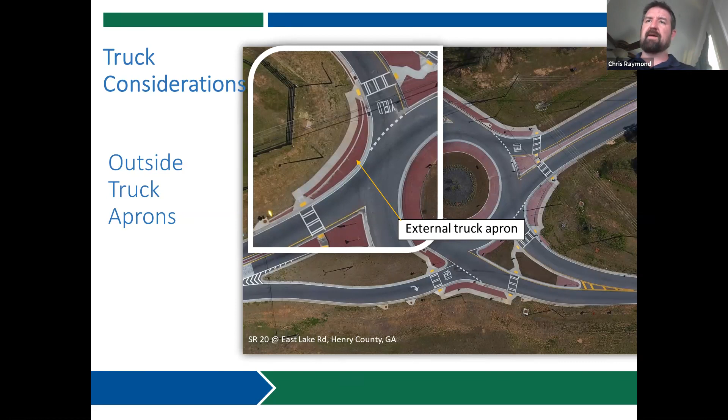Sometimes there are constraints such as a runaway ramp, or say there's a cemetery on one corner, so increasing circle size or moving it is out of the question. Then maybe providing something as simple as an external truck apron could allow you to keep that compact design while still accommodating your design vehicles.

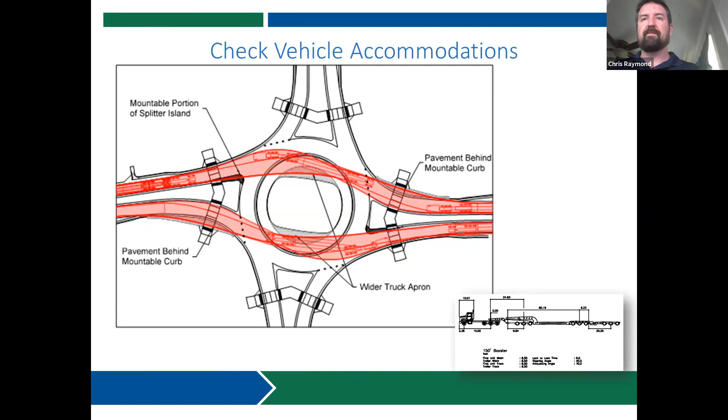Walking them through accommodating check vehicles, oversized and overweight, ensuring that's all being accommodated for, and showing them how to request and receive OSOW permit records.

This is one of the things that I personally think is going to have a positive effect in introducing those turbo elements: multi-lane design with regards to trucks. I always had it in my mind that truck drivers don't know offhand if a designer designed it for a case 1, 2, or 3. So my gut feeling, and I think the research bears this out, is that trucks are going to assume it's a case 1 basically, and that they can't fit in their lane through the whole roundabout because they've probably gone through a case 1 in the past.

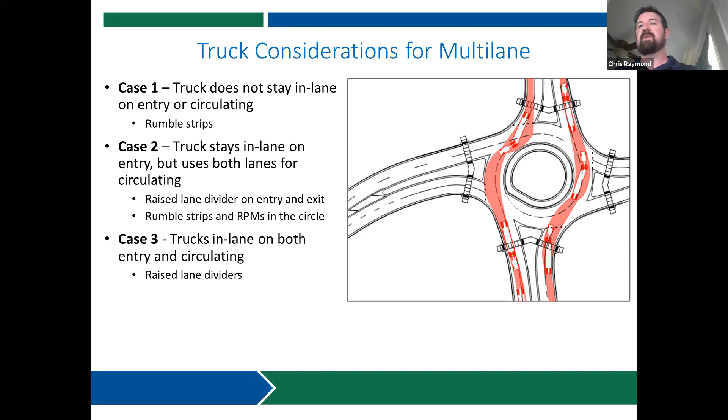So I think one of the things the raised lane dividers that the turbo specifically introduces is giving the truck driver some sense of security—a raised physical element that probably more confidently means to them that they can maintain their lane, either through the entry or through the circle itself.

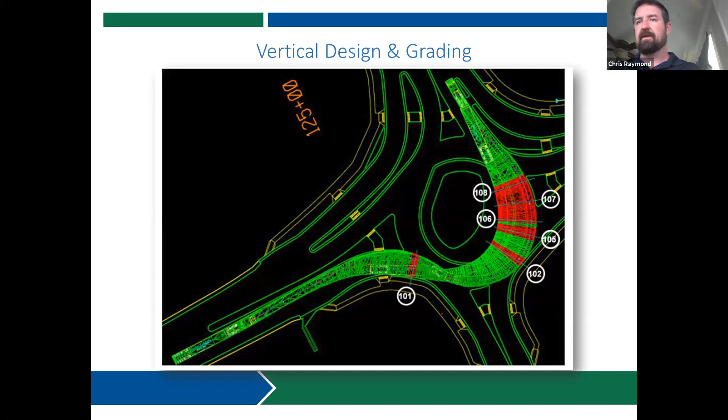So we go through path alignment concerns, walking through the pitfalls designers may run into, and vertical grade issues designers may come across, such as high points in the truck apron, those low boys catching on as they go around—ensuring that doesn't happen.

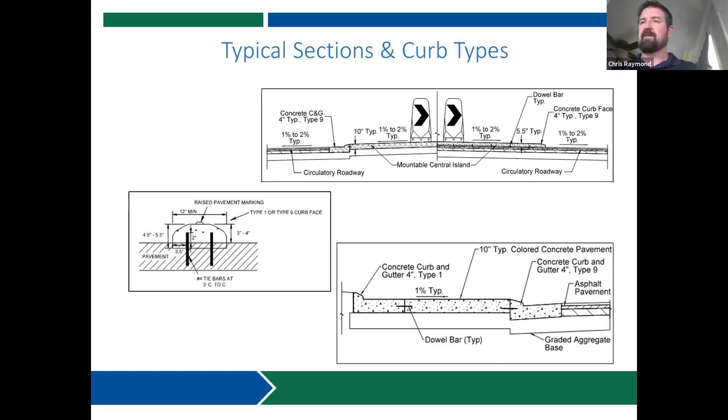Some other things we're really pushing towards are doing slab on asphalt, to preserve that existing asphalt if it can be maintained, which also helps with disrupting or reducing disruption to traffic.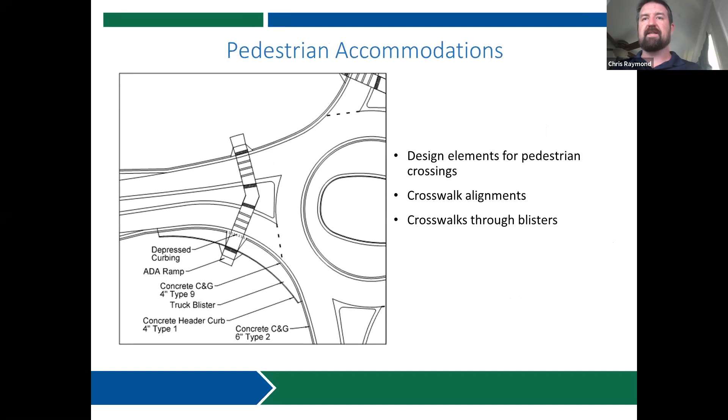Pedestrian accommodations, talking specifically about situations where you have the external truck apron—how to design that without having pedestrians stand out in the truck apron, which is obviously a pretty important thing.

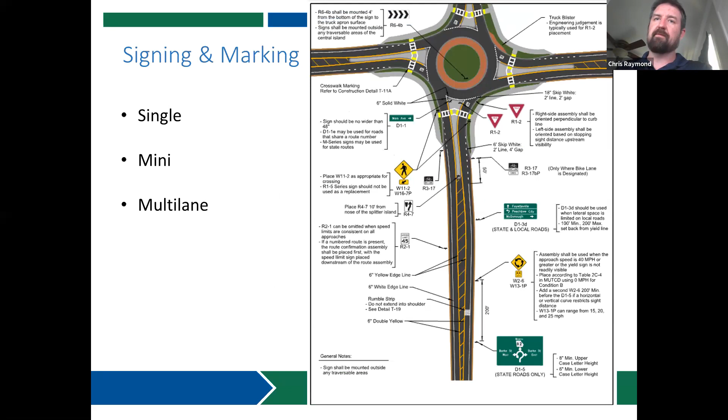Getting into the traffic control devices, we've got detailed drawings showing our preferred layout for signage and marking on both single lane and mini, for multi-lane, and we've got multiple examples for cases 1, 2, and 3 that are going to be introduced, showing how to handle those raised elements and stripe accordingly.

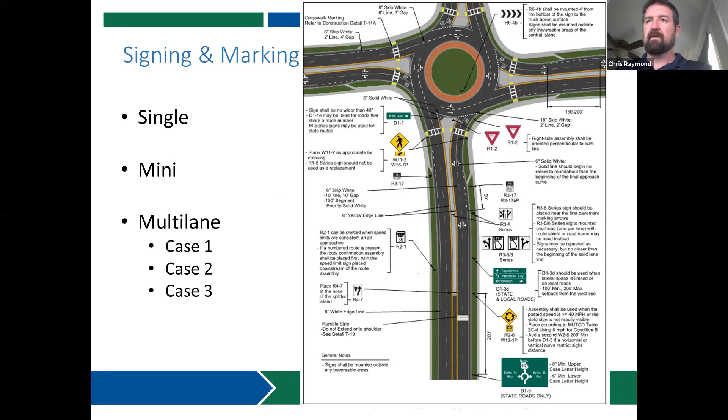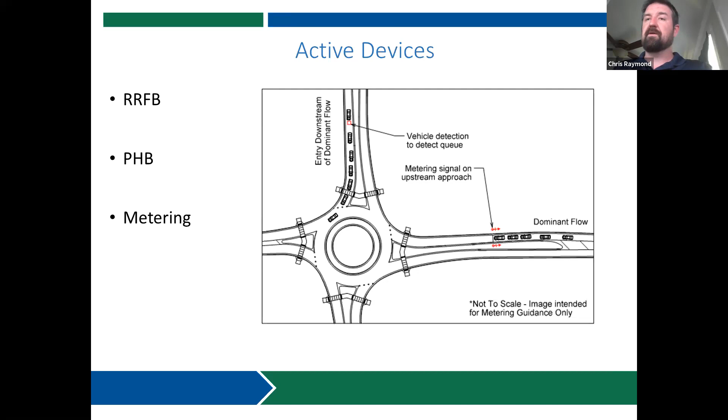We're also introducing sections on how to approach active device situations where you're either doing RRFBs for pedestrians, pedestrian hybrid beacons, or even metering signals to optimize an existing design and keep from having to punch it out to a full multi-lane if at all possible.

We're also looking at giving designers guidance on how to handle roundabouts around railroads. For the most part, the railroad community isn't a big fan of roundabouts in or near their tracks, but we're trying to get rid of the theory that it has to be difficult and that it can't be done safely.

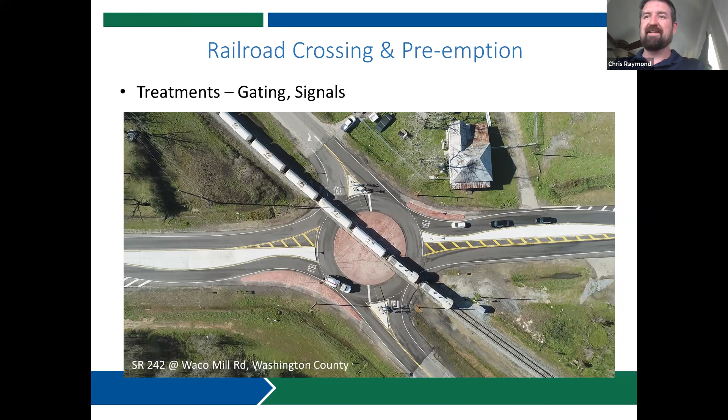This is an example down in the southern districts of Georgia. Obviously the train tracks running right through the roundabout was quite bold indeed. And even providing guidance on landscaping.

Again, we see it as more than just a pretty element. Restricting the sight line through the roundabout gives the driver some sort of visual indication that they're approaching something more than just a straight section of roadway, and helps increase the safety aspect of the roundabout beyond what it already contributes.

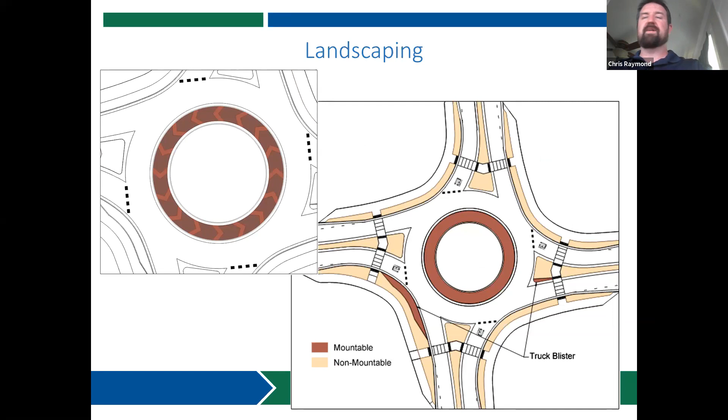And looking at ways to do mountable and non-mountable concrete to give better visual indication to drivers of which areas are to be driven on versus which areas are to be avoided.

And finally, we're getting into some of the practical design elements. Mark McCulloch was talking about right sizing, but we've moved beyond right sizing, Mark. We're down deep into practical design, which is like right sizing extreme.

So, minimizing staging cost. We've learned a lot from building mini roundabouts on methods we can carry over into full design to both reduce cost and reduce impacts as these are being built.

Going to even more compact designs of single lanes, and again using some staging methods to help minimize the impacts.

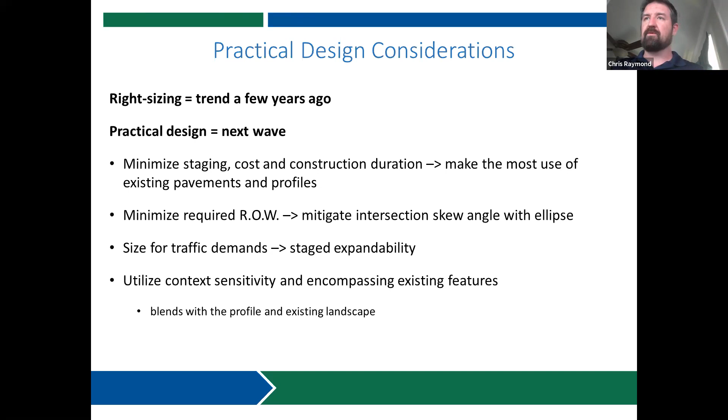One thing we've seen driving costs up is that designers or construction companies just don't really enjoy building roundabouts when they have 5 or 6 stages of traffic to work under. So we're really trying to minimize those traffic staging situations to give construction companies a product that's easier for them to build, and make them really want to go out there and competitively bid to get that work.

Some other considerations: reduced drainage, like McCulloch mentioned, using ditch lines instead; reducing splitter island lengths when appropriate on less high-speed approaches; and introducing other elements such as rumble strips or more signs, other mitigations besides physical splitter islands, to bring speeds down as drivers approach.

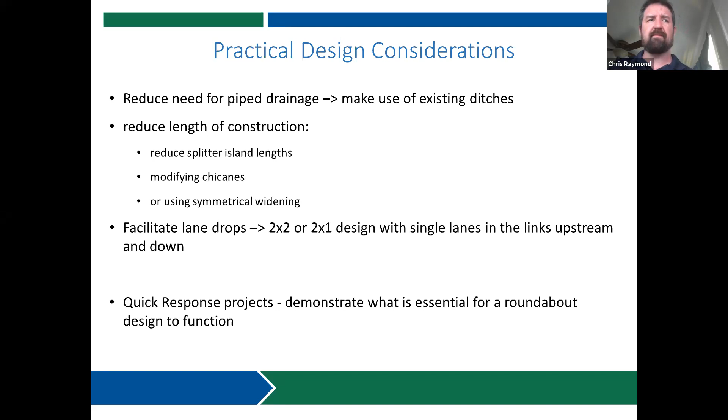Again, those quick response projects, which for us are projects under $200,000 typically. We've built over a dozen roundabouts of that type, and they've provided a lot of feedback on how to do practical design in an extremely efficient manner.

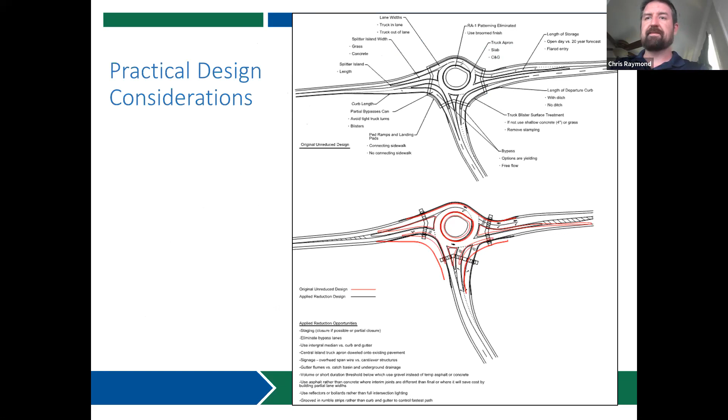Here's some examples of right sizing and minimizing impacts. This is a great example of an original design with some really outrageous, and certainly very safe, approach alignment to get those speeds down, but possibly a little too much, especially given the cost difference between the design at the top and the one at the bottom. Giving designers better tools to do more efficient designs is really just a key element of this document.

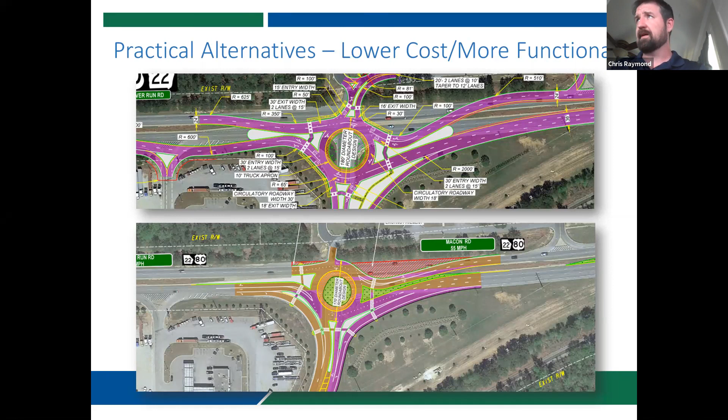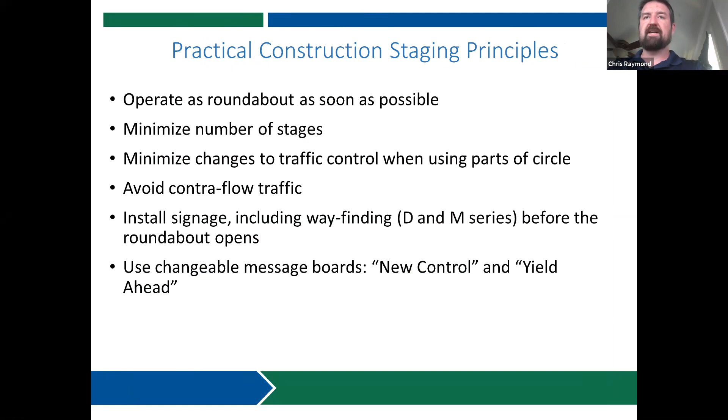Some other practical design considerations: getting it as roundabout as soon as possible, minimizing staging, like I said, all those things. I tried to blast through that pretty quick, but that's all I have for you guys.

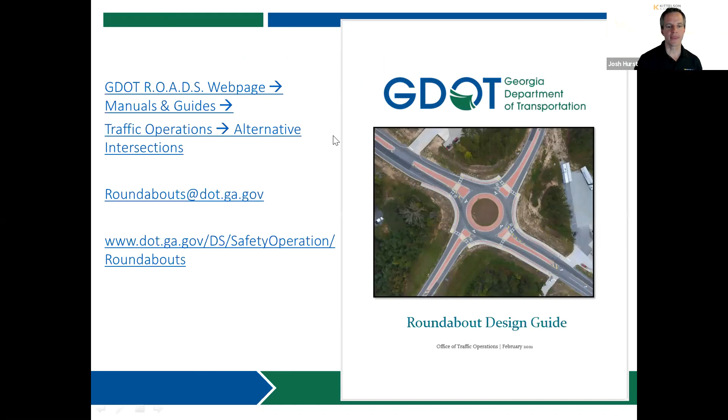So this first one is for Mark McCulloch. On the locations you showed for the mini roundabouts, was a before-after safety study looking at collisions done for any of those locations?

And I plan to go a little bit deeper into it this summer with a summer help student, where we're going to assign a dollar figure for each crash that happened to see what the comparison is of before and after, as far as the cost analysis goes, in terms of how it's impacting society.